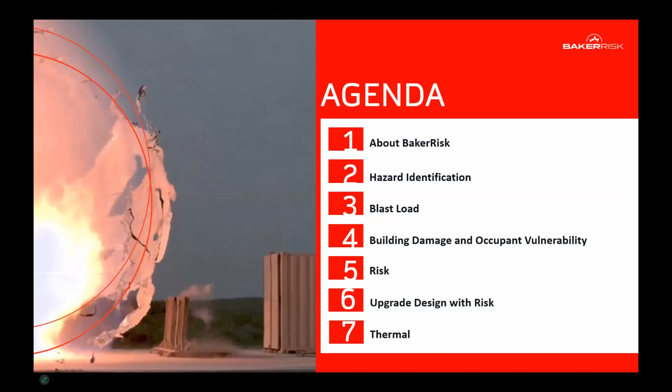But before we discuss this webinar's topics, I do want to introduce you all to BakerRisk and remind you who BakerRisk is. At BakerRisk, we have a single mission: to provide solutions to manage hazards and risk. As a 100% employee-owned company, we've been completing this mission for over 40 years. At BakerRisk, we have over 200 employees committed to this mission, and we continue to expand it not only at our home base in North America, but now around the world. Glad to be with you in Egypt, opening our offices there in 2023, and also in the UAE in 2024.

When people ask me what BakerRisk does, an easier question to answer is who the people at BakerRisk are. We are very curious and inquisitive engineers and scientists. We really enjoy asking the question, why? That's foundational at our company, and that's why here at the bottom of this diagram, we have testing and research. The things that we do are based on answering questions in the field, in application, at our test facilities. You'll see the benefit of several of these R&D and testing operations throughout our presentation. It's through that foundation that we're able to do things like this: industry knowledge share, offer consulting services to our customers, and then provide software and products that make it more efficient and effective to manage hazards and risk.

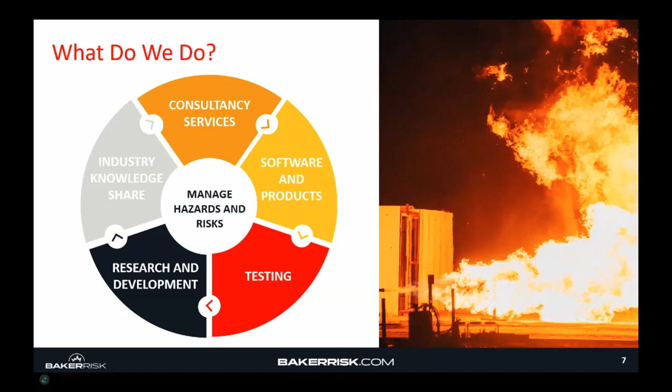We provide our services in four key areas: process safety, structures, blast, and incident investigation. The industries that we serve range from manufacturing to agriculture, to LNG, to oil refining. Industries that have exposure, handle, or manufacture flammable, toxic, or otherwise hazardous materials. These are the industries that we want to help in managing their hazards and risk.

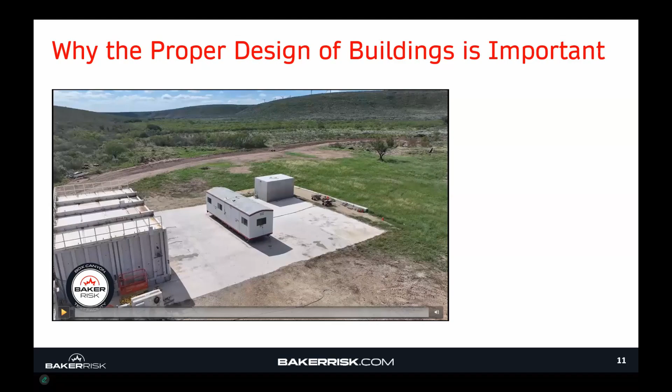Moving into the content of the presentation, Anay and I wanted to get things started off with a handful of videos to demonstrate the key areas of our topic, namely what is blast resistance and what impacts blast resistance. So to do that, the first thing I want to do is share a video with you. This is a video of a test completed at the BakerRisk test facility located in Texas. This test facility is called our deflagration load generator, which is the steel box you see on the screen. That is where our blast load is going to come from. The test object is a wood building. I'm going to run the video and then we can have some brief findings afterwards.

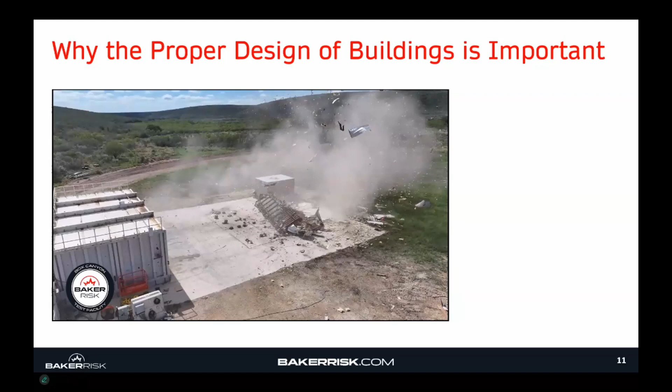This is a great video to start with because the outcome is so extreme. But what's our key takeaway? Our key takeaway is that blast loads can cause significant building damage. Before I let Anay show the next video, I also want to point out a different finding: there are actually two buildings in this screen. The first was this light wood building, and the second was a reinforced concrete building towards the back of the test pad. So a second takeaway, which isn't immediately obvious, is that building damage also depends on type of construction. You will receive different levels of damage from the same blast load for two different types of construction.

Okay, Anay? Thank you, Travis. As Travis mentioned in the videos, the purpose of the videos is really to demonstrate what the hazard does to the building and to appreciate the response of the buildings, so that we can take lessons from it and use it in our analysis and assessment. So what you will see in this video is response. If you could just play the video.

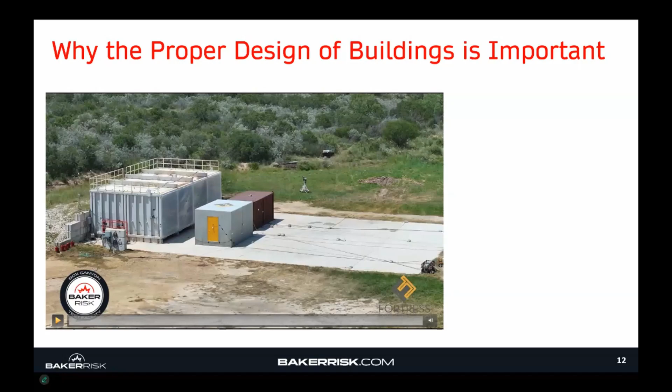You can see this is a different type of response than what Travis showed in the previous video, where we had a global movement of the building as opposed to a destruction of a portable building.

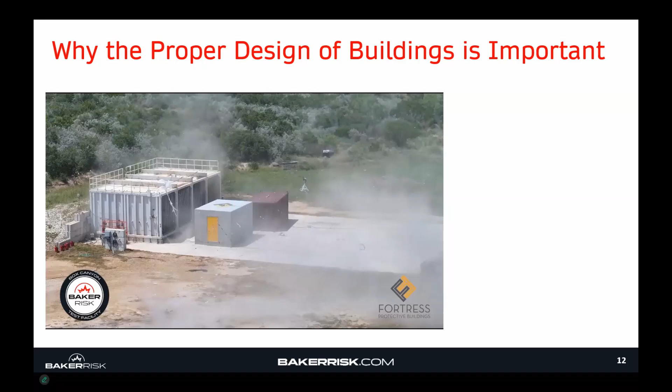One quick point, the reason we chose these videos specifically is portable buildings have a global appeal. You can see these buildings on various sites across the world. So what you're seeing here is applicable to a wide range of sites, and there are different forms of portable buildings, even including in Egypt.

So with that, we'll move on to the next video, and we'll look at another aspect of building response.

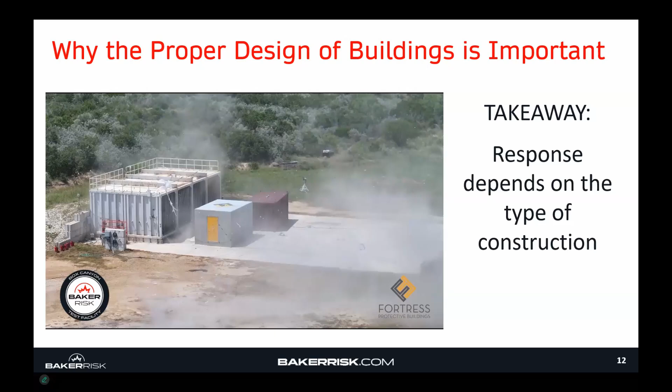This next video is actually two videos. This is taken inside, video cameras placed inside the buildings we just watched in the previous video.

While the previous video highlighted the response of portable buildings and how the response depends on the type of construction, this video highlights why it's important to understand what happens not only outside the building, but inside the building as well. This first video is of the interior of the red building, the building that slid in the video we just watched.

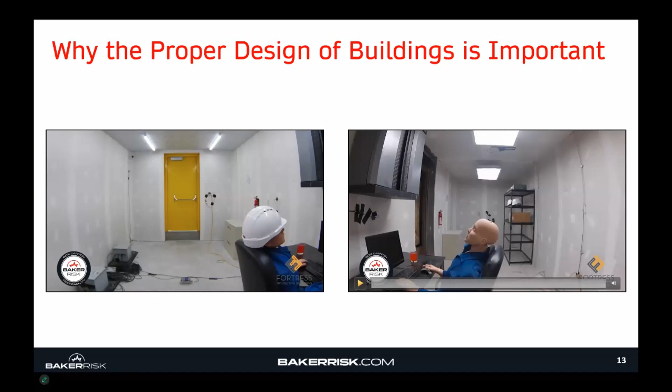So the response inside the building is quite a bit different than what it looked like on the outside. Interior debris hazards, people moving around inside the building due to the response.

And then we have the video of the gray building that did not slide in the video shown previously. You have to look quickly because there's not a lot of movement that happens in this video, not a lot of interior movement inside the gray building.

So what's our key takeaway from these three quick videos? Building damage can be significant. Building damage depends on the type of construction, and just knowing the building damage itself is not enough, you have to know what happens inside the building.

So the key points and takeaways, I will let Travis chime in based on his significant experience in the design and construction realm, is that hazards from explosions can be significant and can have significant consequences and different kinds of consequences. So damage to the building envelope, sliding of the building, movement of the building, and internal debris in the building.

And that's why we showed the video to illustrate that some of those hazards or consequences may not be obvious, and these are essential to focus on for upgrade and mitigation efforts. Once we know the mode of failure and the hazard, we can address the mitigation effectively and provide a cost-effective solution to mitigate the hazard or risk.

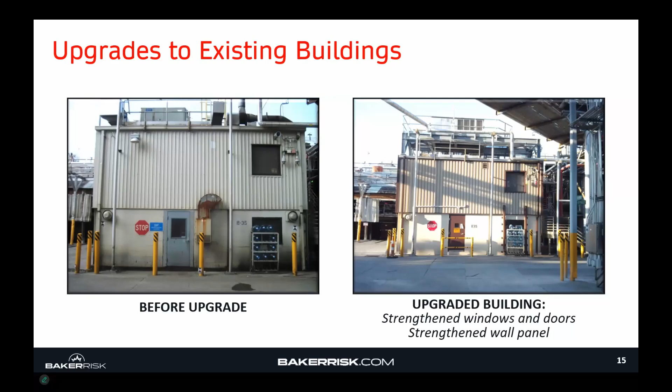We've also looked at a similar building where the wall needed to be upgraded in place. So concrete columns were added to the exterior to strengthen that building.

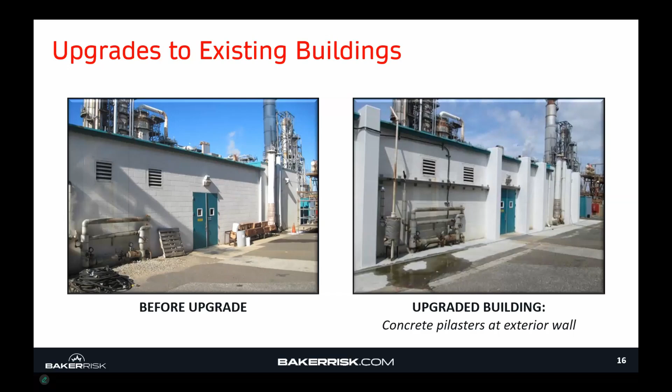Moving up in levels of extreme upgrade, in this case not only the walls needed to be strengthened for this concrete block building, but the walls and roof needed to be strengthened to address the blast concern.

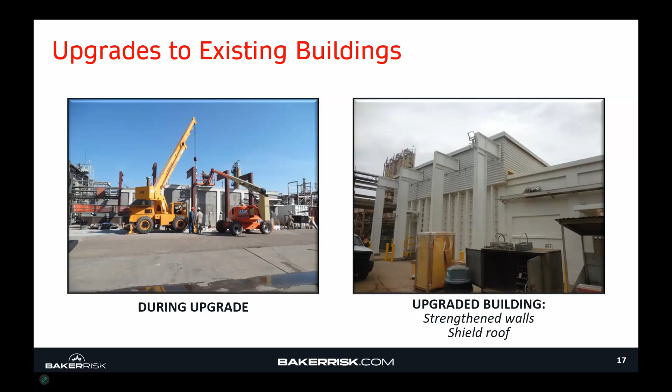In this image here, this was a dual upgrade, for both blast and toxic resilience, where a cocoon building was constructed over the existing building.

And this is actually a good place to highlight that most of the time the buildings we're upgrading are critical to the operations. So making sure that the operations within that building can continue, or at least partially continue, during the construction process is of utmost concern. That's why this cocoon building allowed operations to continue while the building was being upgraded.

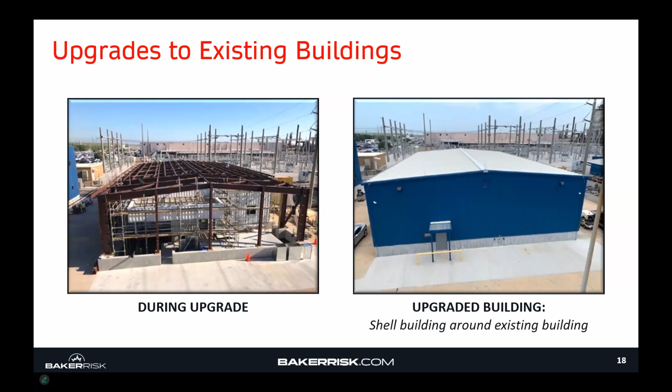And then finally, again demonstrating a building under construction, in this case both the walls and the roof again being upgraded to address the explosion hazards.

So we show these images of previous work that we've done. The time it takes to develop a design and the cost it requires to implement the design can be significant. So making sure the decisions that are made leading up to the implementation of the upgrade are well thought out and well reasoned is important.

And those are the types of topics we want to address in this webinar. It all starts from square one, which is hazard identification. And I'll let Ane briefly walk us through that process.

Yeah, thank you, Travis. So as Travis mentioned, it all starts with hazard identification, and I'll walk through this quickly. I think it's an important aspect of design is identifying the hazard and defining a design basis of what you are designing a building to, or a retrofit to. So I'll walk through this process quickly because it's not the main topic of this presentation, but it's good for engineers to be aware that you're designing for a certain hazard, typically in a petrochemical refinery.

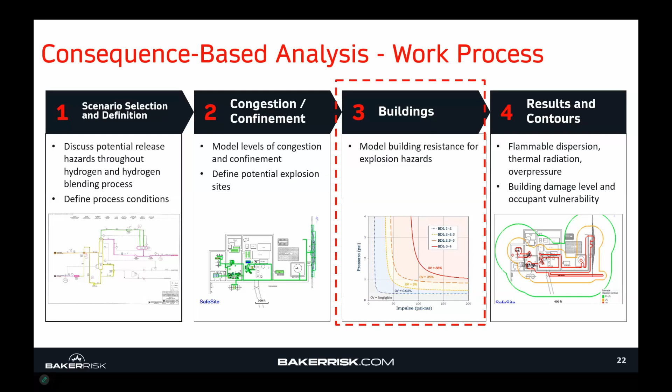Moving on to the next slide, I'll get to the key points of why this is important. It's important for the members of the project team to be aware of the hazards which form the design basis. It's important because it can serve as a good quality check.

So we're not working in our silos of process safety people, structural people, etc. We're working as a team. And again, the severity of the explosion we're designing to depends on the hazard. The key parameters are what's the explosion energy, what's the standoff distance from the hazard, and the nature of the hazard. A brief description of those included in your structural documents could serve as a good quality check.

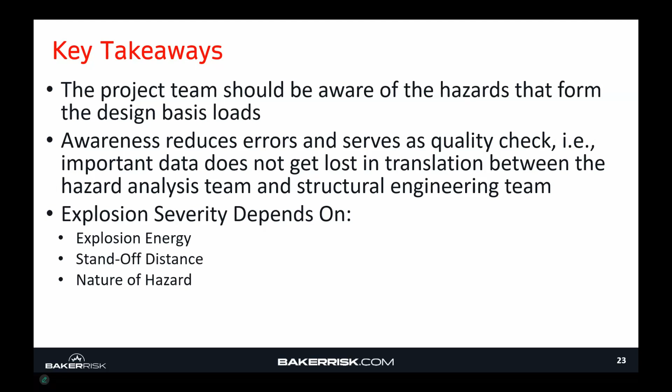So with that, this is a good segue into the next topic, which is the blast load. Again, the main focus of this is explosion hazards, which start with the load, and the load could originate from many different sources. It could be a BLEVE, it could be a bursting pressure vessel, or the most common of them all, a vapor cloud explosion. I'll walk through a couple of examples quickly, and that sets the stage for us to talk about building design in more depth.

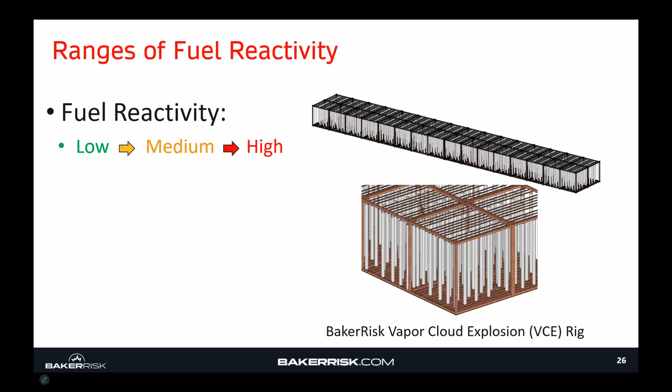Typically, vapor cloud explosion is governed by the level of congestion, confinement, and most importantly, the fuel reactivity. We typically categorize fuel reactivity into three categories in the Baker-Strehlow-Tang method: low, medium, and high. I'll show you some examples in the following videos of what the difference is.

One of the most commonly found low reactivity fuels is methane, or natural gas. What you'll see here is methane released in a congested area for the purposes of this test, and you'll see the explosion in the video.

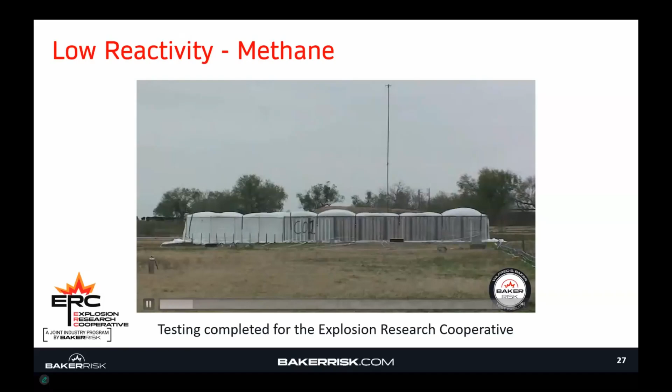Now, I hope your audio was on, because the visual impact of the explosion is really complemented by the audio, which gives you a sense of the magnitude of the explosion. And that was low reactivity.

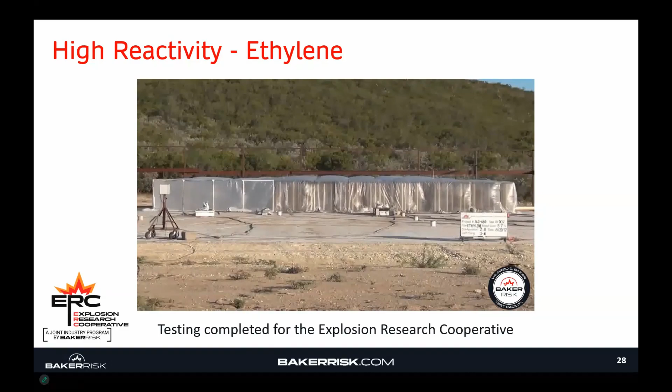Now we move to high reactivity, which is ethylene, it could be hydrogen, and other fuels. If you look at this video—again I hope your audio was on—you could see that it's a much louder explosion. All things considered equal, just the reactivity of the fuel was different. So this gives you a sense of the blast hazard to which you're designing.

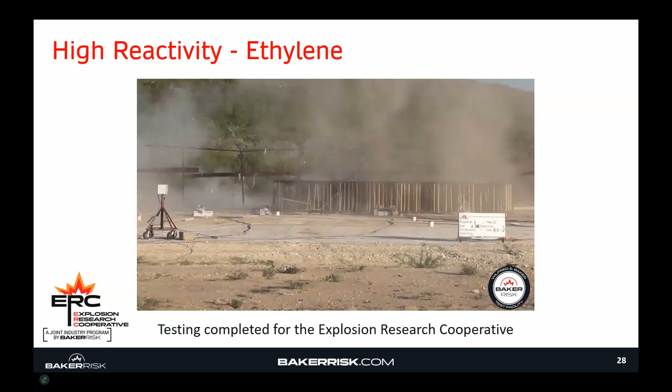With this, the key takeaway is that the explosion pressure is going to decay with distance. You'll see in this video, which is a slow motion video, the explosion originating at the source and slowly propagating forward, and you can see that fireball as part of the explosion wave.

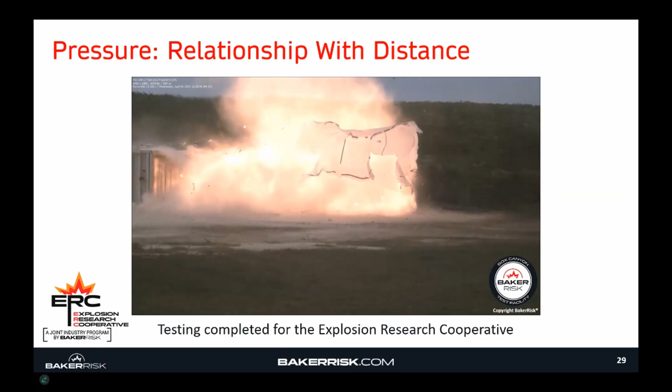So that's a brief overview of explosions. In the next slide, I'm going to give just two takeaways: material reactivity and standoff distance are the two key metrics from the standpoint of a structural engineer in appreciating and understanding the explosion hazard for which you're designing a building. So with that, I'm going to hand over to Travis.

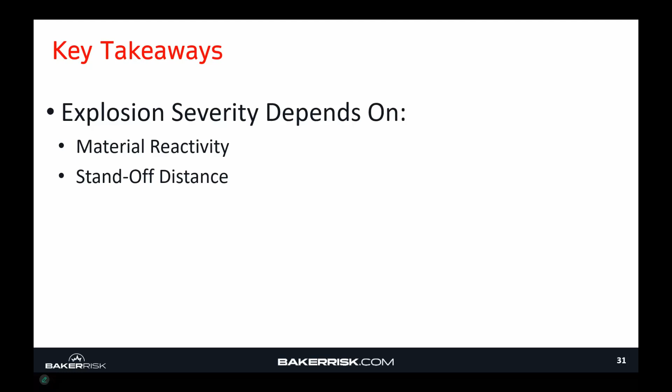Just to piggyback on a couple of points that Anay was mentioning, we now have the explosion hazards, how to calculate them or what to consider. Now an important question is, how does explosion hazard impact the buildings that we're concerned with?

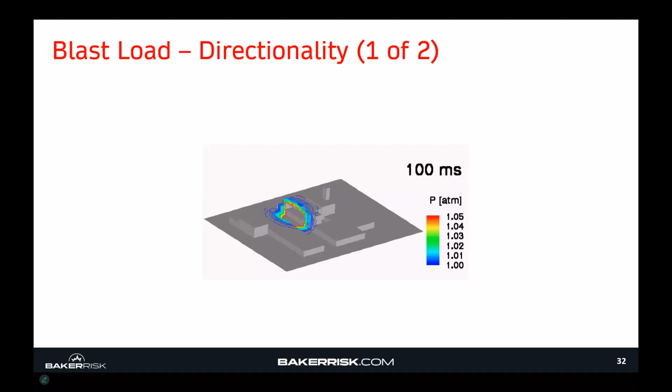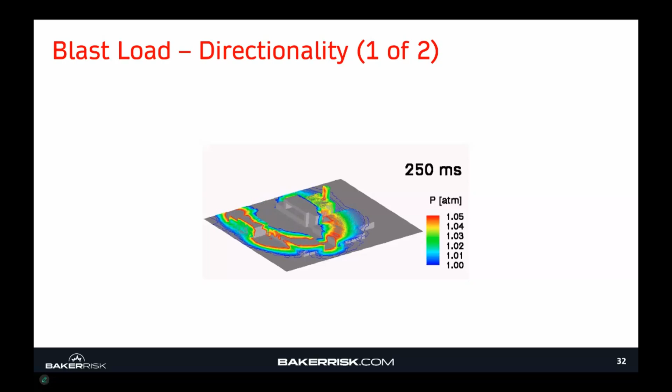This is a computational fluid dynamics model that shows a blast wave propagating from a source and then applying on a building. The important takeaway is the blast loads are applied on all surfaces of the building, not just the front wall or the roof, but a pressure wave is applied to all surfaces.

Related to that, when a blast load is applied to all surfaces of the building, the walls that face the explosion source will sustain a reflected blast load. That blast load is at least two times greater than the load experienced on the side wall, not facing the explosion source, typically called a side-on surface.

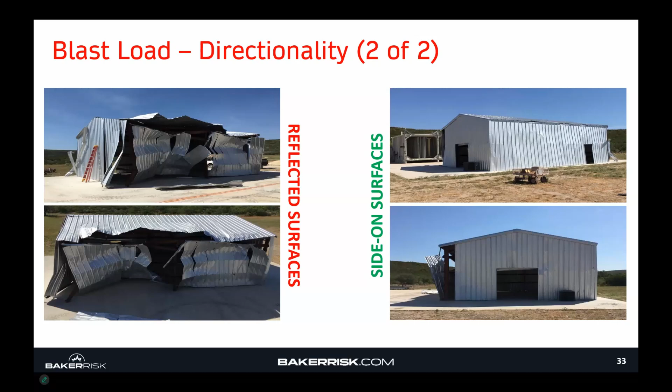So in addition to the takeaways Anay mentioned on explosion severity, we also look at how blast loads are applied to the building. Remember that blast loads are applied to all surfaces, and walls that face the explosion source will see a higher blast pressure than walls that do not face the explosion source.

Moving away from identifying the hazard and now into building damage and occupant vulnerability, this is the portion where you're completing the hazard study to understand the consequence of the explosion. We calculate consequence in terms of damage and occupant vulnerability.

Before we define damage and occupant vulnerability, I want to briefly revisit the term pressure introduced in the previous slides, and then introduce the term impulse. All these terms are important as we prepare to develop an upgrade to a building that has or is expected to be damaged from a potential explosion source.

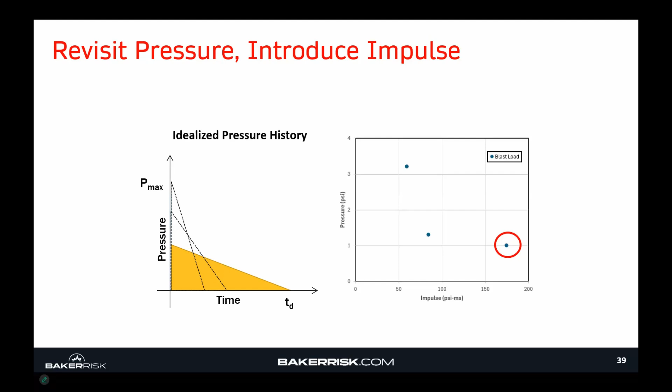This is a plot of pressure and impulse pairs on a graph, and it turns out a building will respond to different combinations of pressure and impulse with the same level of damage, as long as those pressure and impulse pairs fall along this curve of constant damage, or an iso-damage curve.

This is an important principle because it means that a very high pressure yet low impulse blast load can cause the same damage as a very low pressure, high impulse event. This is sometimes counterintuitive—different pressures can cause the same level of damage—but the important variable is not just pressure, but also the impulse of that blast load.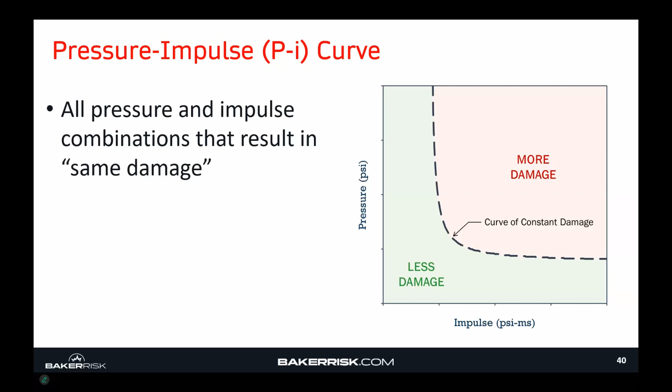Now I can take this principle of constant curves of damage and form what's called a building damage level curve, which combines several ISO P-I curves to define different levels of damage to a given building. In this plot, I'm showing a low through a high level of damage for a given building, and with this I can categorize how it will respond to any combination of pressure and impulse, or any blast load I calculate.

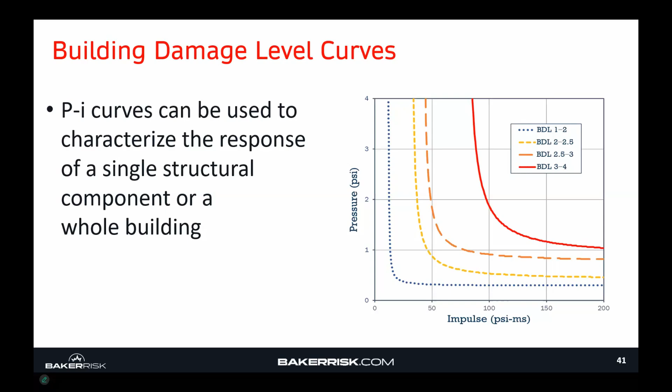Let's walk through a couple of real examples to demonstrate how a plot like this can be valuable. I'm going to show two videos, completed at the BakerRisk Box Canyon Test Facility located in Texas. This testing was funded by the Explosion Research Cooperative, which BakerRisk has been running for well over 20 years with companies who deal with similar hazards.

The first video is of a metal building. This metal building is a conventional metal building, not designed for blast resistance. The second video is of that same metal building, but tested at a higher blast pressure and higher blast load.

In the first video, at least from the exterior of the building, we don't see a lot of damage to the structure. In the second video, though, as I increase the blast load, I see significantly more damage to the building structure.

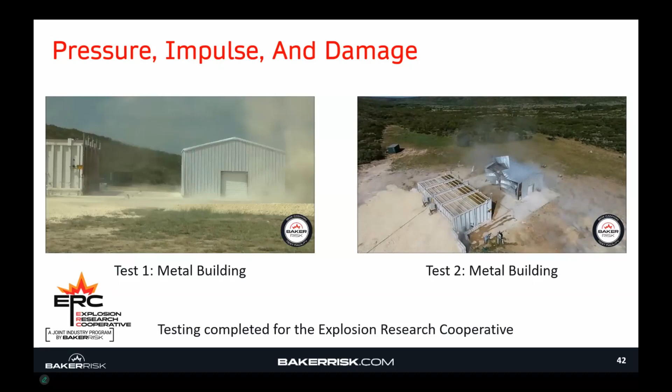Now, taking the building damage level curves we showed earlier and the test we just recently saw, test 1 resulted in low building damage, so the pressure-impulse pair for that test would plot towards the bottom left-hand corner of the graph, low damage. My second test, which had higher pressure and higher impulse and resulted in higher building damage, would plot towards the top right-hand corner of the plot.

This is just an example of how a building damage level curve could be used, and also an example of how the type of construction can vary, and how damage to the same type of construction can vary with the magnitude of blast load.

Now that we know how buildings respond to blast, we want to know what it is we're protecting inside the building. Just knowing how the building responds is not enough to transition from a consequence assessment to a building upgrade. Answering the question of what is being protected is important.

What you may be protecting is critical equipment. The first photograph on the left shows a motor control center damaged after an accidental explosion inside a facility. Here you see the roof joists, or roof framing members, have actually collapsed on top of the motor control units.

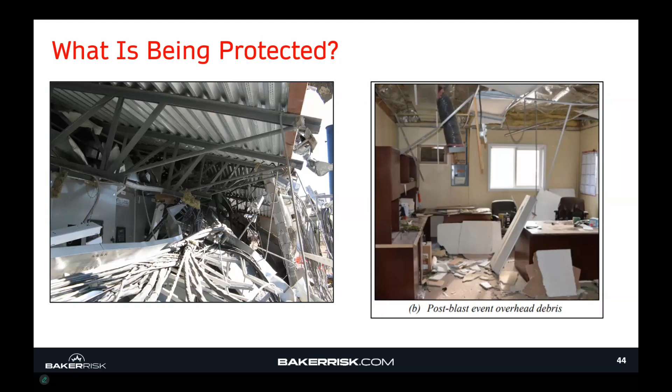So if we're trying to protect people, we need to define the term occupant vulnerability, which we define as the percent probability that an individual is injured or becomes a fatality after an explosion. We now want to ask: what is it that drives occupant vulnerability?

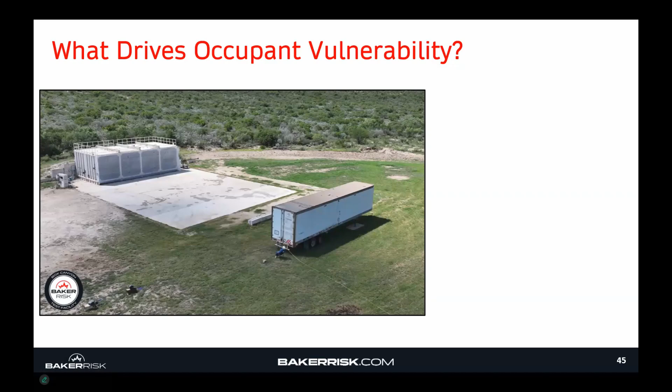We revisit the BakerRisk deflagration load generator. In this test, the test specimen is moved farther away from the DLG rig, and we've placed a semi-truck container in front of the rig. Next to the semi container, you can see a person in blue with a hard hat. This person is not inside the trailer, but will be exposed to the same blast load as the trailer.

So let's watch this video.

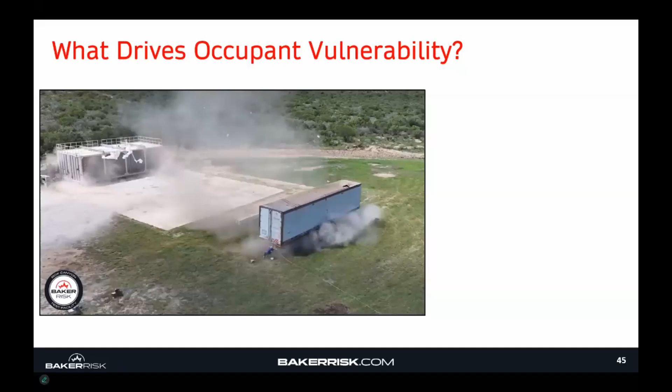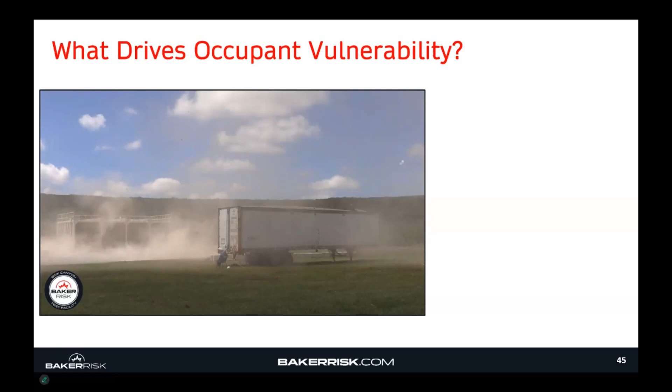Two things we want to take away from this. One, you could visibly see the damage to the trailer — the trailer's roof was partially peeled off, and you saw the overall racking of the trailer. The second thing is that the individual sitting next to the trailer appeared to have a very low response to that blast load.

The person's hard hat was knocked off, but for the most part the person, or dummy in this case, stayed in place. So what's our takeaway? Humans in the open have a high tolerance against overpressure compared to building structures.

Now let's demonstrate what happens inside that same structure. This is revisiting the same test again, but now I'm taking a look inside the building, inside the trailer, where we've placed two dummies, one in a seated position and the other in a standing position.

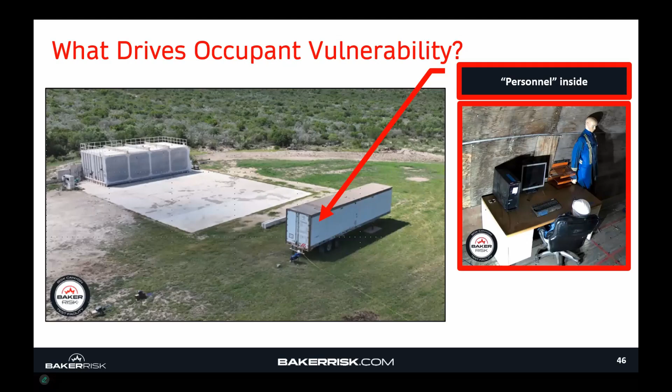This video is taken from inside the trailer. The blast comes from the bottom left-hand corner of the screen and applies to the building where the person is seated, with the other person standing just off camera.

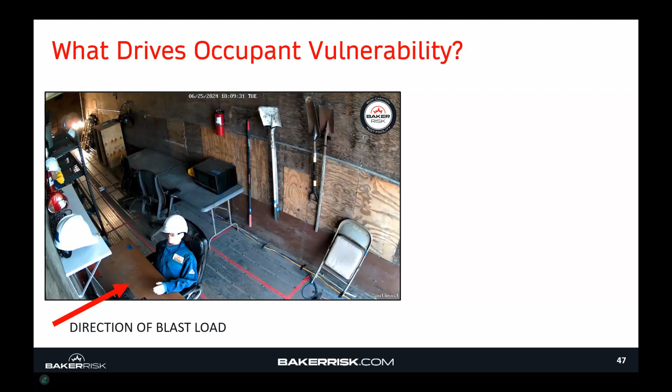A different level of response for the individuals, compared to the individual on the exterior of the building. So what's our takeaway here? The vulnerability of humans is higher when inside a building.

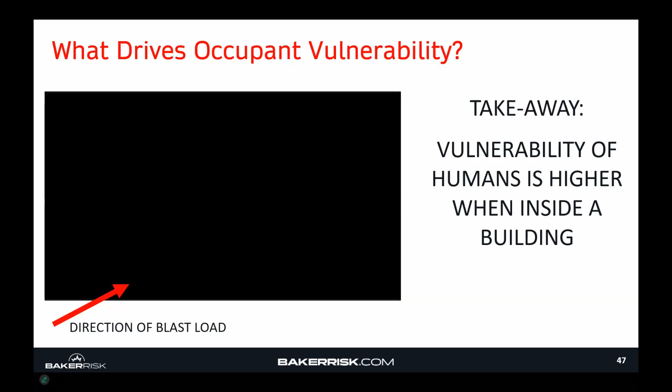Answering the question we started this discussion with, what drives occupant vulnerability in a blast event? It's the building structure — the damage to the building structure or its contents — that drives vulnerability, not the blast wave itself.

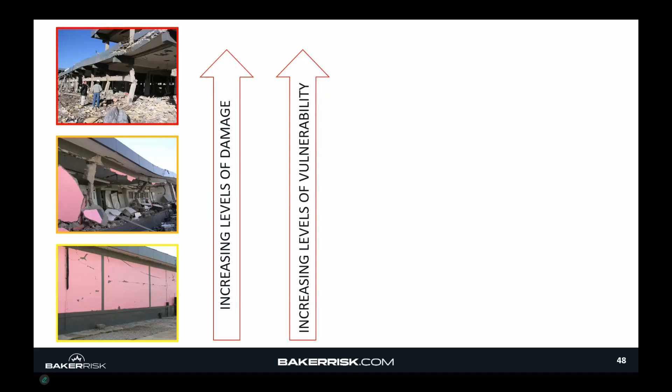We can correlate this: as we increase the levels of damage to the building, we would expect an increase in levels of vulnerability. In fact, that is true — as we increase building damage from low levels to higher levels, the occupant vulnerability inside the building increases.

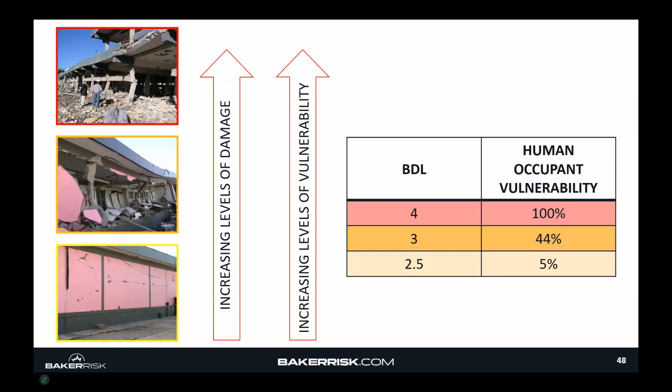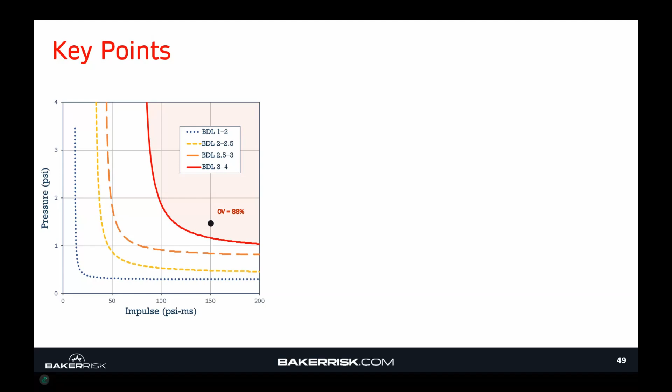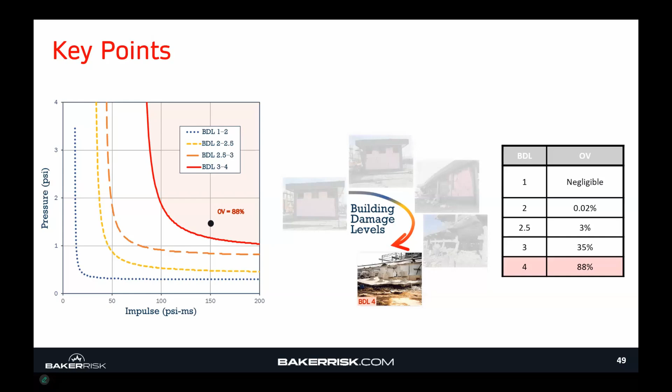Now, taking all the points we talked about and summarizing them: we first introduced a pressure impulse curve that we can plot blast loads onto to determine levels of building damage. We then introduced that for a given building damage level, there is an associated occupant vulnerability, and as we increase building damage level, we also anticipate increasing occupant vulnerability. Putting these pieces together, using pressure impulse curves and defined levels of vulnerability, we can define building damage level and occupant vulnerability for any given blast event for a given construction type. This is an important principle as we move into the next topic of risk, specifically explosion risk analysis.

Thanks, Travis. Before we talk about risk, one quick takeaway from what Travis presented. I know the audience has a background in various specialties, but one key takeaway is that when we hear a building is blast resistant, it's important to understand what pressure it was designed to, what impulse it was designed to, and what damage level. Oftentimes from a practical standpoint, we get information from process safety teams saying the building is blast resistant with 3 psi blast resistance, and our follow-up question would be: but what's the impulse it was designed to, and what damage level?

So just wanted to mention that before I move to the risk assessment, which is a topic of great interest to me because it ties the structural aspect and the process safety aspect into a metric we typically use to manage and mitigate risk. So what I'm going to focus on is building damage combined with frequency, and how it eventually results in the main metric we measure against, which is risk. So moving on to the calculation...

Travis has introduced the concept of the pressure impulse diagram, which you can see here. These different pressure impulse curves, also known as PI curves, are essentially lines causing similar damage. In this case, building damage: the red curve separates damage from heavy to collapse, and the other curves show lesser and lesser damages.

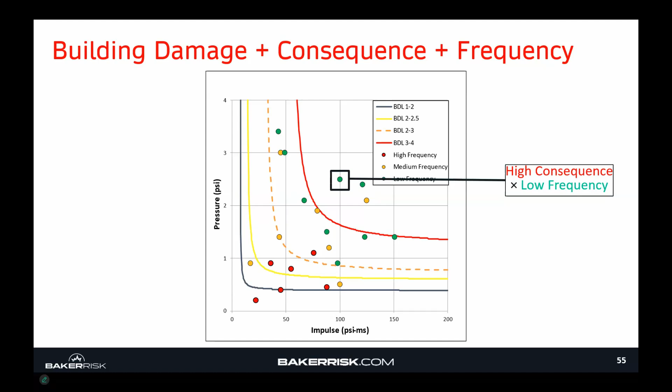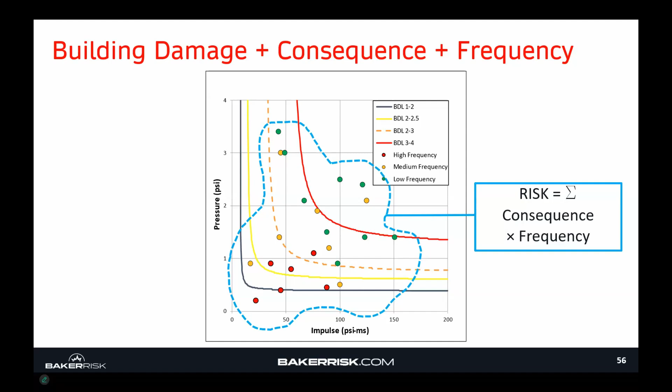In the next illustration, this is a nice graphical illustration showing that risk is cumulative. In other words, risk from each one of these dots gets added up, and the summation of each risk component gives you a cumulative or total risk to the building occupants, illustrated here as consequence multiplied by frequency, where frequency typically comes from a risk analysis. How this ties together at a big picture is shown in the next slide: you can repeat this process across sites where each building will have an individual risk and a societal risk. The BIR column, the individual risk column, is typically independent of the number of people in the building. The SBR column, or societal building risk column, is a function of the number of people in the building.

And you can see across the site, when you do a risk analysis and calculate risk, this gives you a good basis to prioritize how you move forward with your capital projects for risk mitigation. In this example, you will see the risk building with the highest risk contributors highlighted, and that would be your logical starting point for risk mitigation. It helps your capital project teams prioritize projects and budgets in a way that reduces risk in a defensible and quantitative manner.

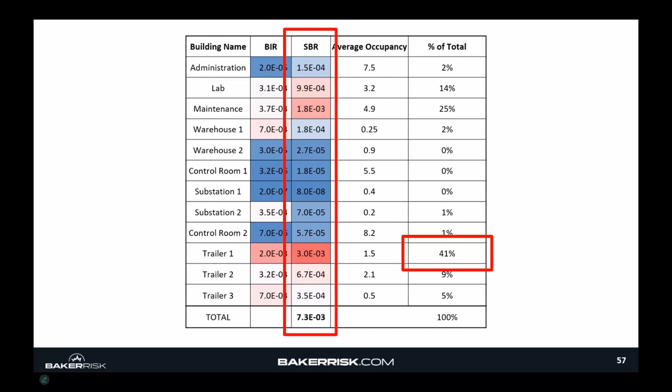Travis, with his experience in capital projects and building upgrades, I'm going to let him talk about the process of risk mitigation from a practical construction standpoint. So I'll hand this over back to Travis.

Thank you, Anay. We spent some time going through this first portion of the presentation, the hazard study, looking at hazard identification, blast hazards, consequences, and frequency. Some of this was background knowledge for this group, but it's very important before we move into mitigation to understand the building blocks of the mitigation. Why are we mitigating? What are we mitigating? And how will we know our mitigation works? If we can't answer these questions, the money we're spending is not worthwhile because we're not addressing the true hazards. That foundational piece is important before we move into this final piece of the presentation: mitigation, incorporating the hazard into protecting your people or your assets on site.

So to do that, we're going to revisit a similar plot that we showed previously, then work through a couple of examples of upgrading a building to demonstrate why looking at explosions is valuable from a risk perspective versus a consequence perspective.

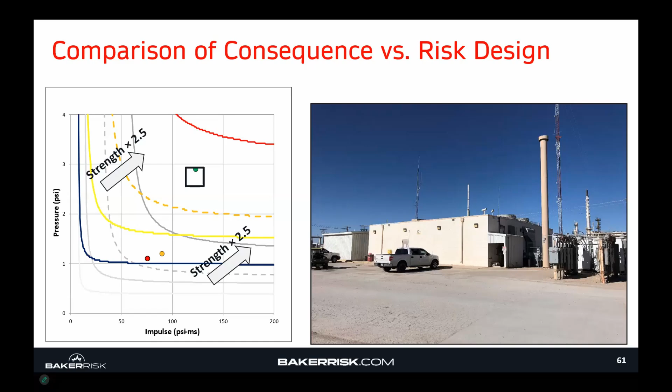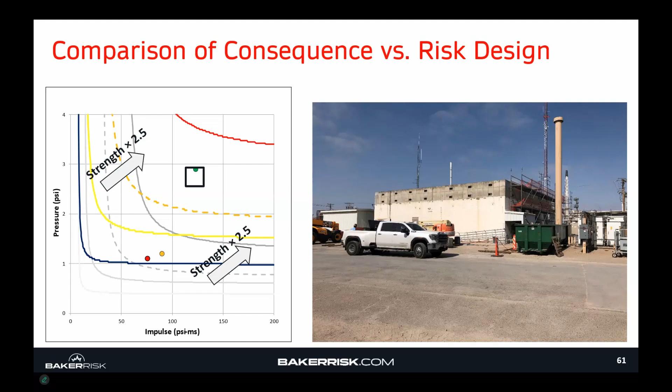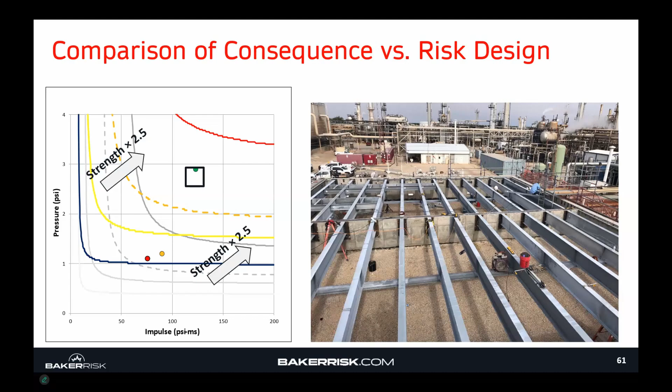What would an upgrade like this look like? This can be done. The roof in this case was perhaps the driver of the damage. A solution that could be implemented is extending the wall structure to where a new roof can be placed over the existing roof, therefore protecting the roof from the blast. This is not necessarily an easy upgrade to implement. Whenever you're starting to do work at the roof, you bring up the potential for overhead hazards, and the potential of breaking the existing weather seal of the building at the roof level. So there are challenges here. It's worthwhile investigating what else can be done or how else to solve this problem.

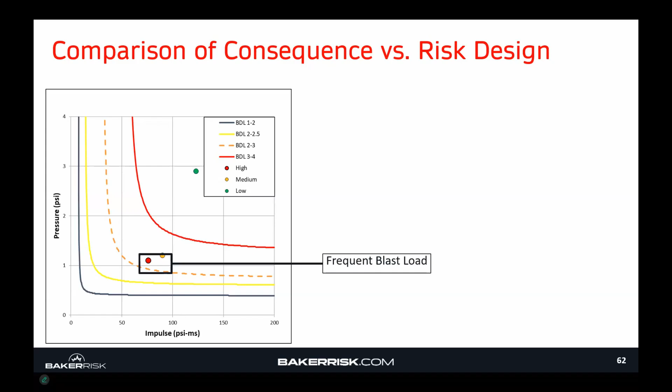So a way to solve the problem differently is instead of looking at the consequence, to look at the risk. That green load had a very high consequence, but a low frequency. At the bottom of my PI plot, there are a couple of loads that cause a lower consequence but have a very frequent occurrence. It could be that if I strengthen the building enough so these don't cause a high consequence, I can have an acceptable risk for my building. So I don't have to worry necessarily about this green plot, which is a very low frequency load. I only need to concern myself with the high frequency events.

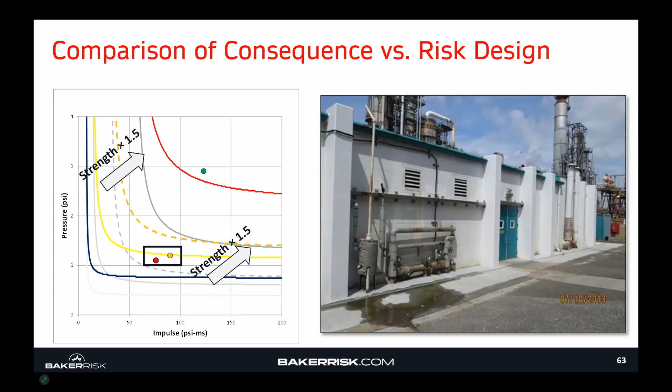Okay, I introduced quite a bit there. Just a brief recap, and we'll go through a couple more examples. Advantages of using risk when you're completing a building upgrade.

Number one, budget. I demonstrated it graphically that when you're looking at risk, there's the opportunity to save construction dollars by addressing your risk instead of trying to address your highest consequence event.

Number two, a measured rate of return. When you know the metric you're measuring against, that is risk, you can quantify the risk reduction relative to dollars spent. So like most operations, there is limited budget, so understanding where the dollars can be best spent for the biggest benefit is important.

And then finally, project efficiency. What is our target? Are we attempting to get into the ALARP region? Are we attempting to get into an owner or industry acceptable risk criteria? Or are we trying to achieve negligible risk? Each of these can be done efficiently when we're looking at a risk metric instead of a purely consequence metric.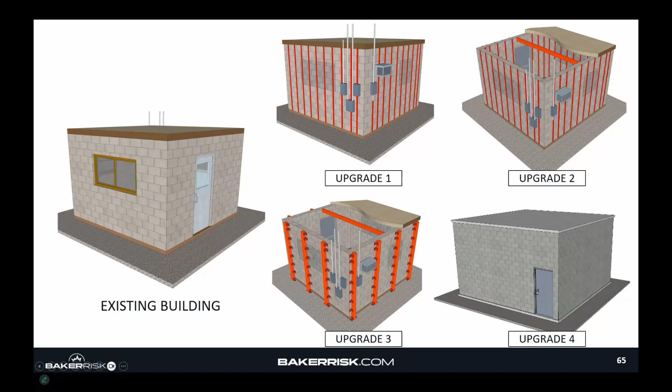In the example, a hazard study has been completed and the societal risk calculated at this given building in the as-is condition exceeds the unacceptable threshold at 5 E to the -3. This is a good candidate for looking at building upgrades and what we can do to lower the explosion risk at that building.

Using the same hazard study, I can calculate, using the principles we showed earlier, what the explosion risk is for the upgraded building, upgrade 1. I can also estimate the level of construction dollars required to upgrade that building.

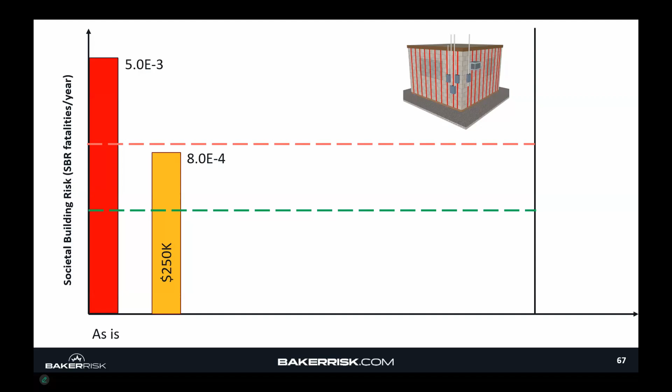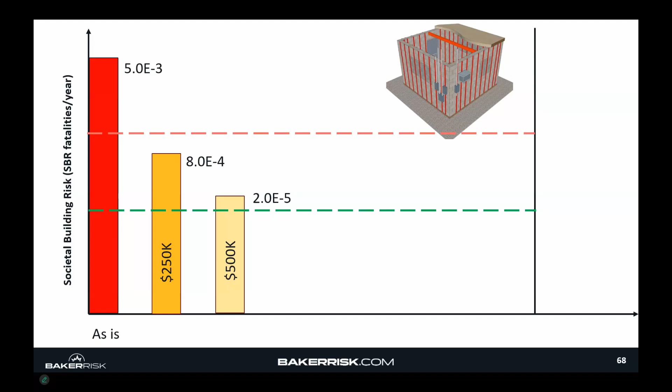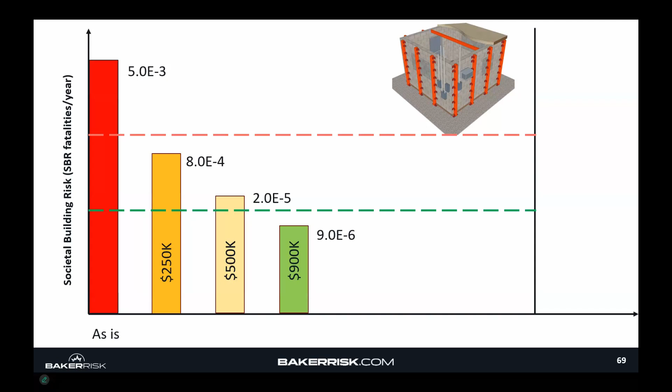I walk through this process for each of the upgrades that I looked at, and what I should be seeing is a decrease in explosion risk with an increase in construction dollars. At a certain point, my calculated risk falls below the green tolerance curve, and now additional upgrades reduce the risk even further.

Let's pause for a second and just look at what some key findings are from a plot like this. The first key finding is that as I'm investing more dollars, I'm driving down the explosion risk. This is a good finding. Each dollar I spend reduces risk further.

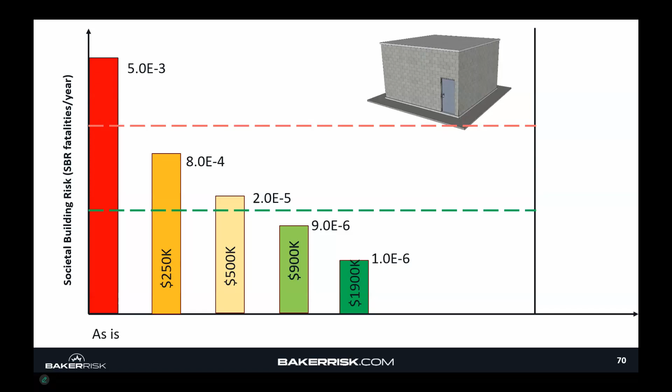The second finding is there's a couple of upgrades where the risk is significantly lower than the lower bound tolerance level. A good question to ask is, why would I develop an upgrade that exceeds my expectations? Well, you can look at this plot differently.

The second way you can look at this plot is how many people can I place in that building and still achieve my acceptable risk criteria. Remember, societal building risk is a function of the people inside the building. As I place more people in the building, my risk goes up.

In the as-is condition, in order to meet the risk criteria, I would have to reduce the occupants in the building to about 1% of what they currently are. As I implement upgrades, that level of occupancy reduction would decrease.

Up until the point for upgrade option 3, where I can actually start adding people to that building and still meet my risk criteria. This is where it becomes important, because in upgrade 4, I can actually double the occupancy in that building and still meet my risk criteria.

If I'm looking at a holistic view for the entire site, I may want to start implementing or addressing more upgrades to that one building, because I can start putting people from other buildings into this protected building, addressing not just the risk at one building, but the risk at multiple buildings.

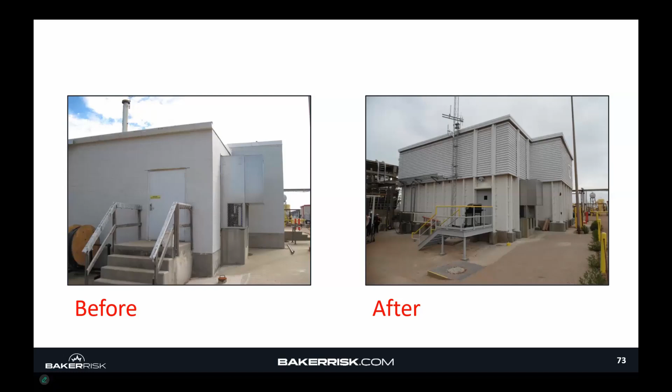This is a control room that required both wall and roof upgrades. In addition to the walls and roof, we've also addressed the blast resistance of the doors to ensure that people, after an explosion event, have an egress point away from the building.

The images I'm showing right now, the primary function of these upgrades is for blast hazards or explosion risk. There are methods we'll show that can also increase the thermal resistance of a building, but right now we're just focused on blast.

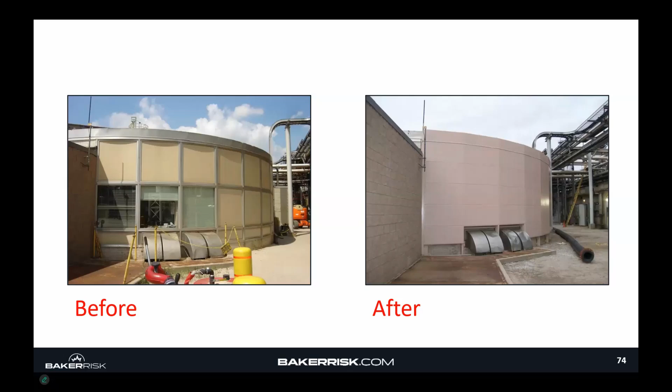This is an example of a building that did not require upgrade throughout, but just at one exterior wall. This highlights several principles we talked about: why does only one exterior wall require upgrade? We discussed previously that walls facing the explosion source have a higher blast load than walls that do not face it. Cost effectiveness was achieved by focusing upgrades only on the wall that received the highest blast load.

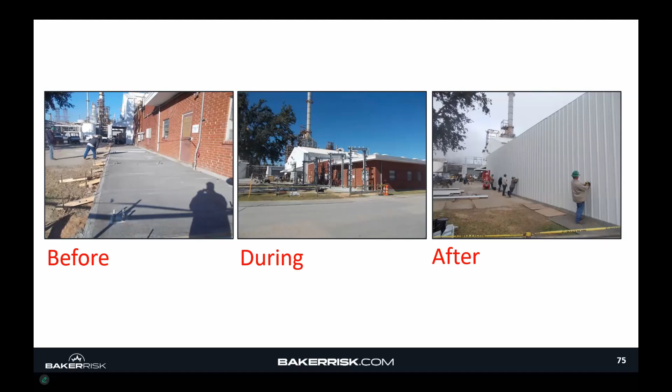Now that we've talked about a couple of examples of building upgrades, I want to let Ane introduce a couple more principles that are important when moving from the hazard study into implementing solutions.

Thank you, Travis. This is our last topic, and one thing I want to say: I've been at BakerRisk for 16 years, and I'm still excited to work in this field because we don't know what we don't know. The next video will illustrate that we're constantly learning of new hazards, and in the process, figuring out new ways of addressing them.

So what you will see in this video is a blast-resistant building, the design of which we've been doing for some time now. By that, I mean designing the building envelope to resist blast loads.

But we intuitively always knew that if you have a portable building not anchored to the ground, and you hit it with a large high-magnitude blast load, it will have a tendency to move. What you can see in the video on the bottom left is exactly that response of an unanchored blast-resistant building.

In the scale of the video, that may not seem significant, but for the blast load the building is rated for, approximately 8 psi, it can move as much as 8 or 9 feet. That's a significant translation. So imagine if this building was placed on a site with a slope on the other side -- it would essentially fall off a cliff. This is not an unusual situation, where buildings are sited close to uneven ground, and yes, you have a blast-resistant building, but it would be a very hazardous location for that building.

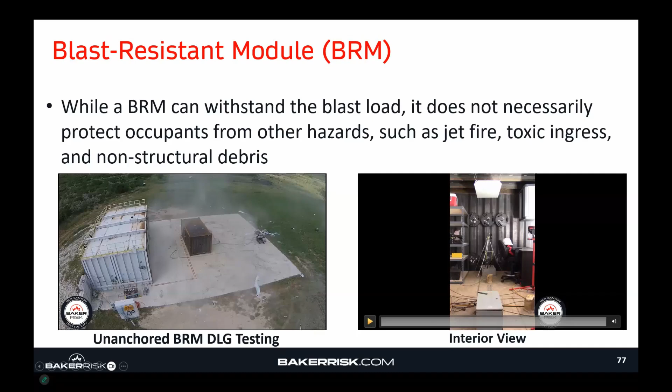Again, what's important here is this is a quote-unquote blast-resistant building. But was it safe? No, it wasn't safe. And that's what we're constantly learning, which is exciting.

What I'm going to go to next is, again, talk about thermal hazards, but introduce why we are talking about it. Blast-resistant buildings, when they became popular, there was a tendency to site them very close to the hazard because they were blast resistant. In doing so, you inadvertently started placing them close to fire hazards -- you've taken care of one hazard and introduced another.

We started this test program 4 years ago to address that question: is a blast-resistant building typically safe for fire? We took the blast-resistant building -- on the left you see a propane jet fire hazard applied to the exterior, and on the right, fire damage inside. An external fire heated the building envelope, ignited the insulation and plywood inside, and caused a fire within minutes. So although the blast risk was reduced, the siting of the building had introduced fire hazards.

So we need to be aware of all kinds of hazards: explosion, fire, and toxics, making sure that the overall cumulative risk is managed appropriately.

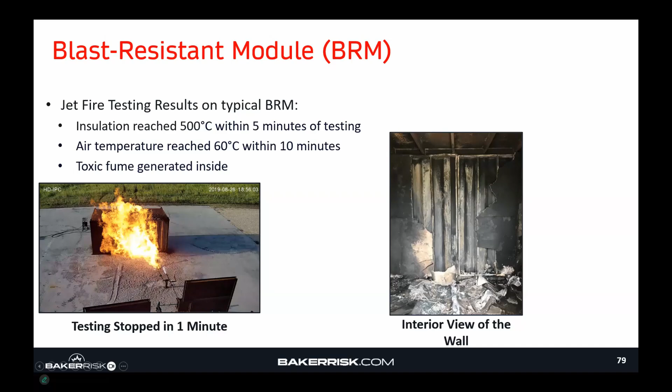And this is a good illustration of that. In the next slide, what you'll see is some mitigation from a fire standpoint. Again, what's important here is that a mitigation suitable for blast may not be suitable for fire, and vice versa. In this case, this is a good measure for fire mitigation, where you could have a firewall between the building of interest and the fire hazard. The wall shields the building from the fire, which typically would not work for blast. A blast wave cannot be stopped with a wall. You could use the wall to mitigate against fragments from the blast, if applicable, but not the blast wave itself. But for fire, a wall can be effective if properly designed with a CFD analysis.

So this was just to illustrate the difference between mitigation options for different hazards.

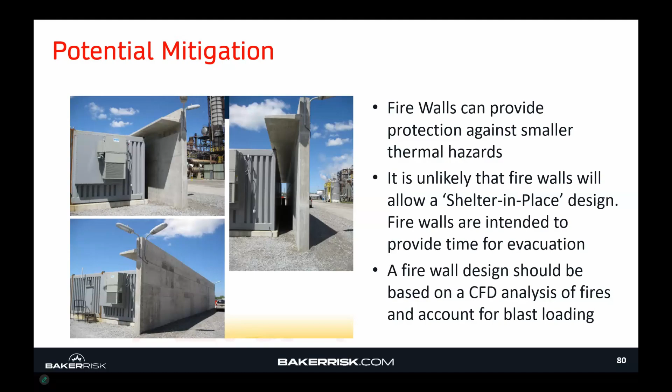And with that, we get to our closing remarks, and I'll let Travis make some remarks and hand it back to Wayne and Naomi. Great, thanks, Anae.

Before we close here, it's been a pleasure being able to share with this group. When we started the presentation, we introduced that BakerRisk has a passion for sharing our knowledge. There are several people behind the scenes at BakerRisk you can't see here who spent countless hours completing the test programs we've shared with you today. It's been a pleasure sharing the learnings from those studies with this audience, and we hope you've taken several key points and learning objectives away from the webinar.

The first of our key points was that we want to understand the consequences associated with explosion hazards. Then we wanted to understand what consequence depends on — it depends on building construction, the magnitude of the blast load, all the things we talked about in the early slides of this webinar. As Anae showed in the last few slides, the consequences may not be immediately obvious. So understanding what the hazards are, how the building responds, and how people can be protected is essential to introducing a successful mitigation program.

As we started this webinar, we wanted you to take away three key points. We wanted to focus on how you can use the QRA, or risk assessment, to develop focused upgrade solutions for your buildings. We wanted to introduce our experience in designing and constructing the required upgrade solutions. And we wanted to introduce the principle of utilizing the risk assessment to implement cost-effective solutions in addition to mitigation-effective solutions. Again, it's been a pleasure talking with you all.

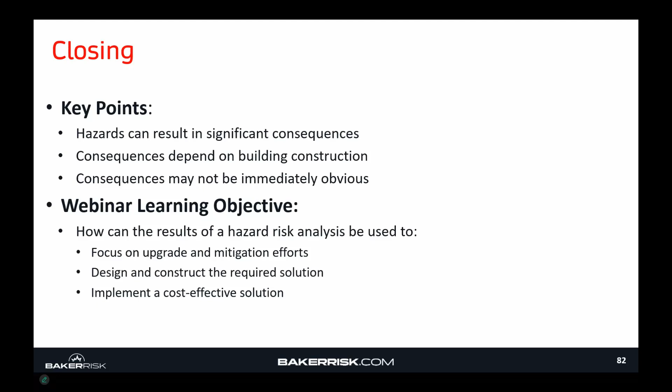At this point in our webinar, I'm going to open the floor with Naomi for questions.